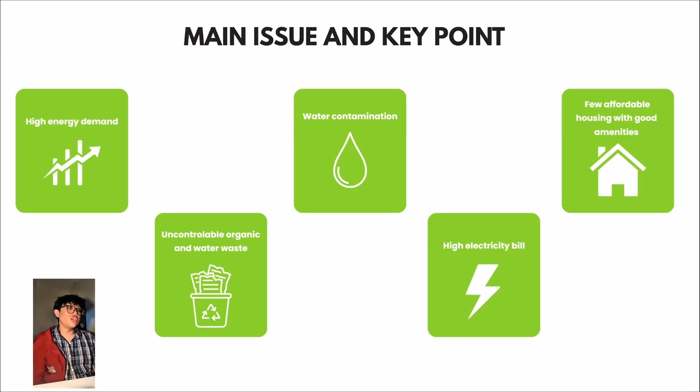Next, I will explain the main issues and key points. First, high energy demand. Second, uncontrolled organic waste and wastewater. Third, water contamination. Fourth, high electricity bills. And fifth, a lack of affordable housing with good amenities.

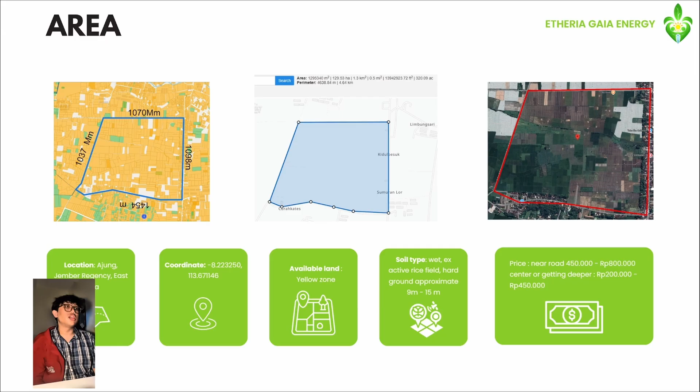And the next one is area. The location in Ajung, Jember Regency, East Java, and as we can see in the image on the left, the yellow zone indicates available land, and the soil type is wet, ex active rice field, with hard ground approximately 9 to 15 meters.

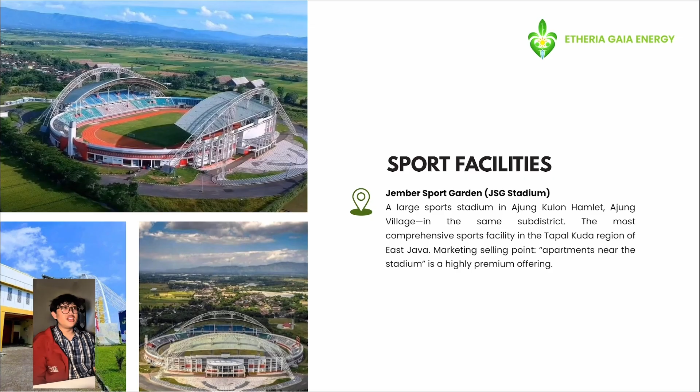The nearest healthcare facilities are first, Dr. Soebandi Hospital in Jember, second, Siloam Hospital in Jember, and third, Ajung Clinic.

The nearest educational institutions include Jember University as well as elementary, middle, and high schools and vocational high schools within the sub-district, the top schools in the city of Jember.

For daily necessities and the nearest food market, there's the Lippo Plaza Jember, Transmart, and the mall. Then there's Tanjung Market, Ajung Mini Market, and the local stores, as well as the Tanjung Manufacturing Industrial Park.

Next is grid and internet, electricity and fiber internet. Next, at the police station, we have the police station, the military sub-district command, and the sub-district office. The next fire station is the Ambipuji Fire and Rescue Station.

And so, these are the locations of the facilities closest to our community. Here is a layout of the community we designed.

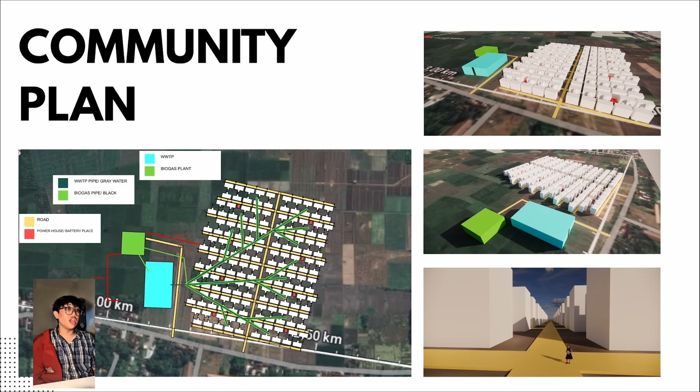Next, the problem in the current surrounding area. Bedadung River water quality. Based on available water quality data from the Bedadung River, there is evidence of serious pollution. The BOD level was recorded at 5.95 mg per liter, exceeding the class 2 threshold of 3 mg per liter, and high TSS and COD levels indicate physical and chemical pollution.

Additionally, harmful bacteria such as E. coli 98%, Aeromonas 96%, and Salmonella were detected, indicating a very high risk to public health. This pollution stems from activities in the surrounding area and is of critical concern because this river serves as the raw water source for the municipal water utility. Consequently, this situation not only impacts the environment but also has the potential to compromise the quality of the clean water used by the community.

Next, regarding organic waste management, approximately 58% of household waste in Ajung is organic waste. However, waste treatment facilities such as TPS3R are not yet available. As a result, much of this organic waste is disposed of directly into rivers, leading to increased BOD levels, decreased dissolved oxygen, and even fish mortality.

On the other hand, approximately 19% of plastic waste in the form of microplastics also contaminates the food chain in water bodies and has long-term impact on the ecosystem. In fact, this organic waste has great potential to be utilized as biogas, which not only serves as a waste management solution but also as a source of renewable energy.

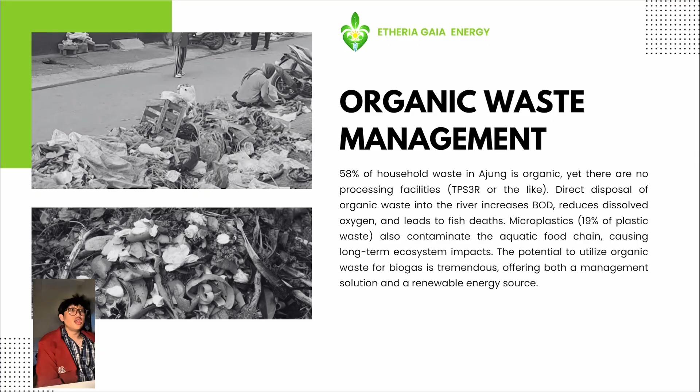Next, potential for organic waste management for biogas. Converting organic waste into biogas is highly feasible. A single residential area with 100 to 200 households can generate approximately 1,700 to 3,400 kilograms of organic waste per month. When collected from multiple areas, this volume becomes a significant source of raw material. With a centralized management system utilizing it for electricity generation, this solution can provide sustainable benefits for the community.

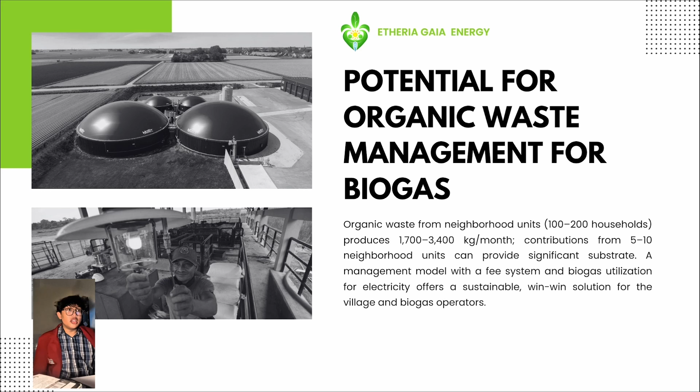The Bedadung watershed is also at high risk of seasonal flooding. In December 2025, flooding occurred at more than 20 locations due to land use change, sedimentation, and suboptimal drainage system. A lack of coordination in management from upstream to downstream further exacerbated this situation, particularly in Ajung Subdistrict. As the central area of the watershed, the risk of flooding is even higher because it lacks a well-planned drainage system and adequate infiltration wells.

In addition, the lack of communal wastewater treatment facility is also a significant problem, as the industrial and agricultural areas in Ajung expand. Domestic and industrial wastewater continues to increase without adequate treatment. Waste such as pesticides and latex enters irrigation channels and flows into rivers, further degrading water quality. Consequently, without centralized treatment, all waste flows directly into the Bedadung River, exacerbating pollution levels.

From a health and sanitation perspective, using contaminated river water for daily activities such as washing and irrigation can increase the risk of infectious disease.

Average energy usage: the electricity requirement per person is 1,300 kilowatt-hours per year, meaning each person consumes 3.5 kilowatt-hours per day. Using the benchmark from Kompas.id, the electricity usage for a household of 4 people is about 10 to 15 kilowatt-hours per day.

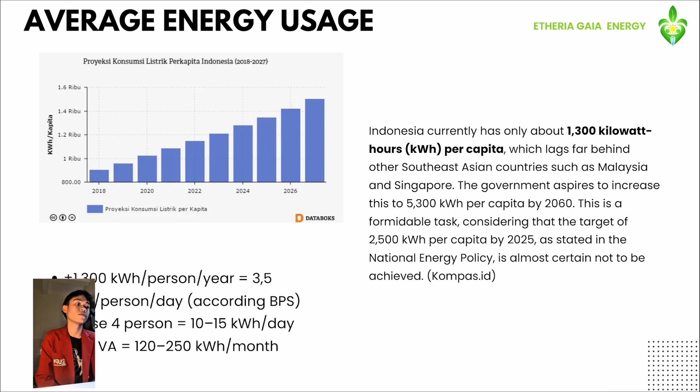For blackwater, we will use a biogas plant, using blackwater from 8,000 people, which can produce 400 cubic meters of waste per day, and collect all the organic waste from residents, estimated at 3 to 5 tons per day. Additionally, we will work with the government to help collect animal waste from nearby farms, waste from the surrounding community, and from traditional markets. We will also collect harvest waste from rice fields, which occurs about 2 to 3 times per year. This can resolve problems such as water sanitation, soil contamination from animal manure, high electricity costs, and high waste volume.

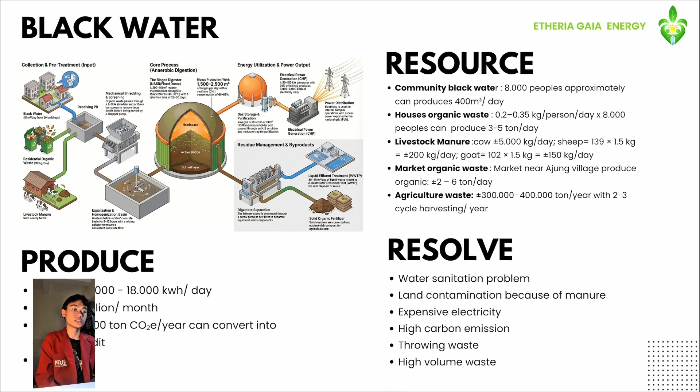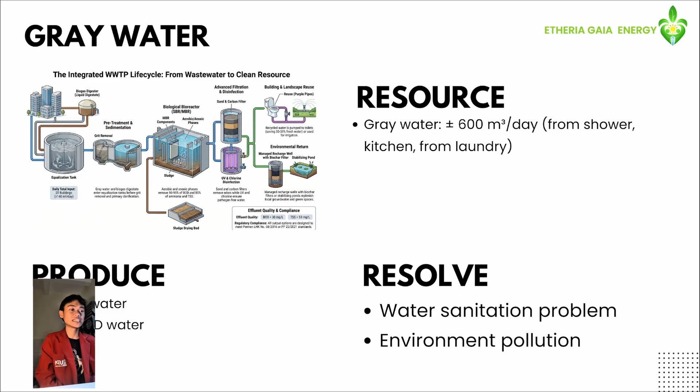For greywater, we will use a wastewater treatment plant using greywater from 8,000 people, estimated at 600 cubic meters per day, capable of producing clean water with low biochemical oxygen demand after filtration. This can resolve issues of water sanitation and environmental pollution.

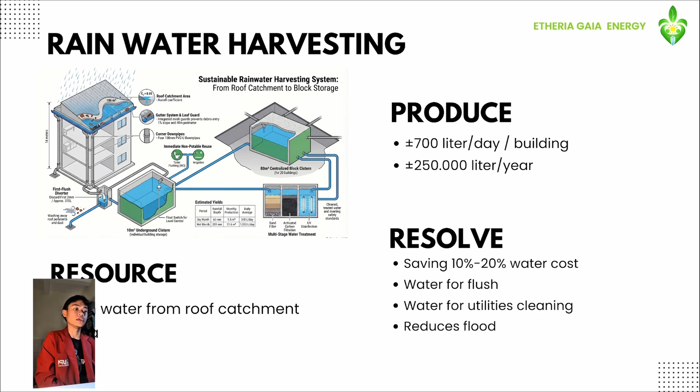Rainwater harvesting: we don't want to waste rainwater that falls from the roof, so we want to utilize rainwater harvesting, which can produce 700 liters per day per building during rainfall, and can cut costs by 10 to 20% and reduce flooding.

Solar panels are the most suitable alternative energy in this tropical country, capable of generating 400 kilowatt-hours and 20 kilowatt-hours per building, with total annual production reaching around 148,000 kilowatt-hours per year. We use monocrystalline panels of 5 kilowatt peak per building and install a battery pack for every 20 houses with a capacity of 100 kilowatt peak.

Solar panels can resolve the following issues: higher electricity costs, reducing emissions, and mitigating outages.

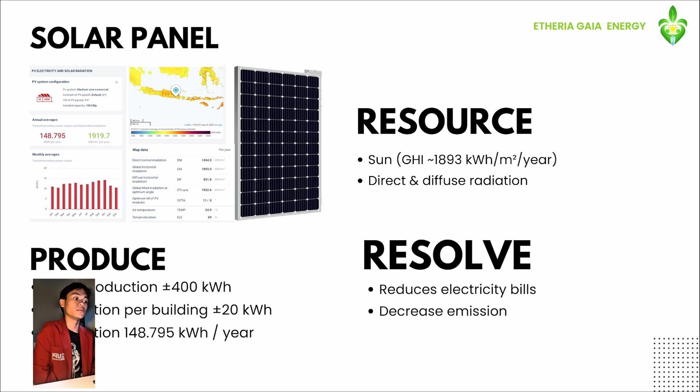Smart grid: since we are using alternative energy sources whose output may not always be consistent, we anticipate energy waste by using a smart grid system. By monitoring electricity usage habits in each unit using meters installed in every building, data will be sent to the powerhouse to distribute power according to each load requirement.

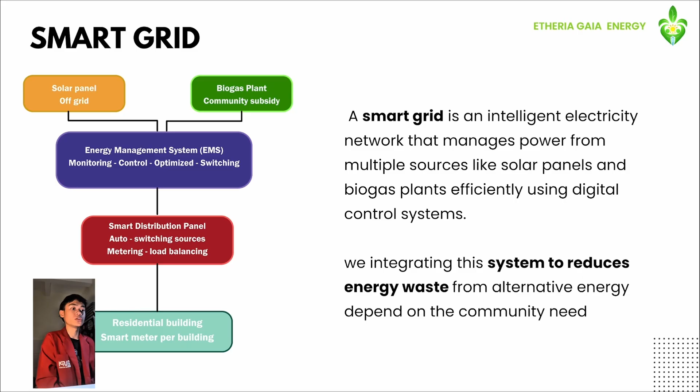Electricity flow: we set up the flow as efficiently as possible to produce electricity that is affordable, reliable, and usable. For the amenities, we have concrete road lighting, biogas, electricity cable, drainage, and wastewater treatment plant.

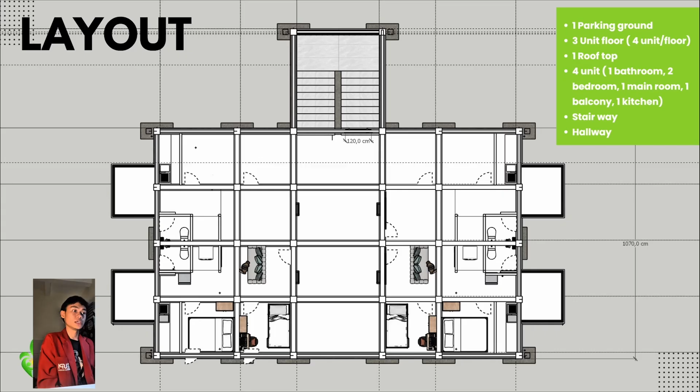This is our building layout, and for the buildings themselves, we have one parking ground, 3 unit floors, and 4 units per floor, one rooftop, and one unit containing 1 bathroom, 2 bedrooms, 1 main room, 1 balcony, and 1 kitchen, with a stairway and hallway.

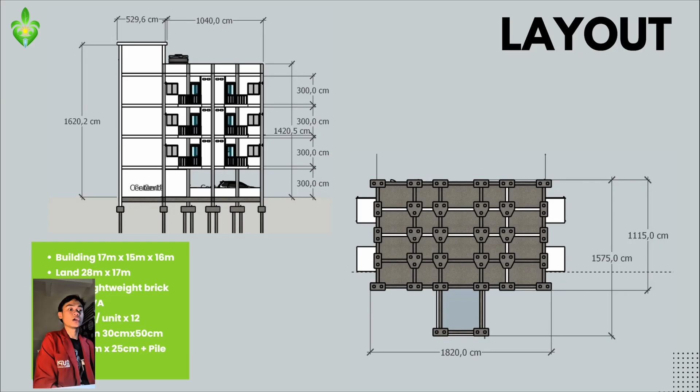For the material, we have AAC brick or lightweight brick, and we have 20,000 volt-ampere, with each unit at 1,300 volt-ampere times 12 units. We have a base, a tie beam using size 30 centimeters by 50 centimeters, and for the pile, we have 25 centimeters by 25 centimeters using a pile cap.

For the design, the main building measures around 11 meters by 17 meters without stairs, with a unit size of 30 meters squared, and per unit size is 5 meters by 6 meters net, approximately 32.3 meters squared gross.

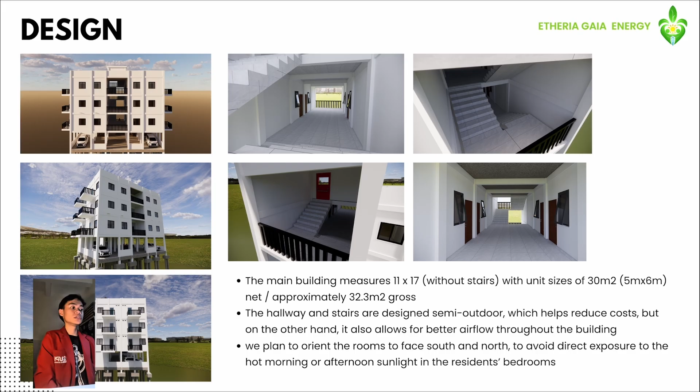The hallway and stairs are designed semi-outdoor, which helps reduce costs but also allows for better airflow throughout the building. We plan to orient the rooms to face south and north to avoid direct exposure to hot morning or afternoon sunlight in the resident's bedroom.

We designed the airflow within the units using cross ventilation to avoid air getting trapped inside. We use 15 cm by 30 cm vents above every door, install windows in every room, and benefit from a balcony door that can be opened for better air circulation.

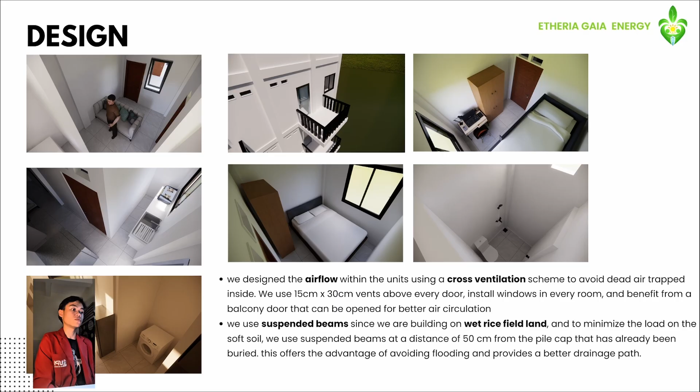We use suspended beams since we are building on wet rice field land, and to minimize the load on the soft soil, we use suspended beams at a distance of 50 cm to 100 cm from the pile cap that has already been buried. This offers the advantage of avoiding flooding and provides a better drainage path.

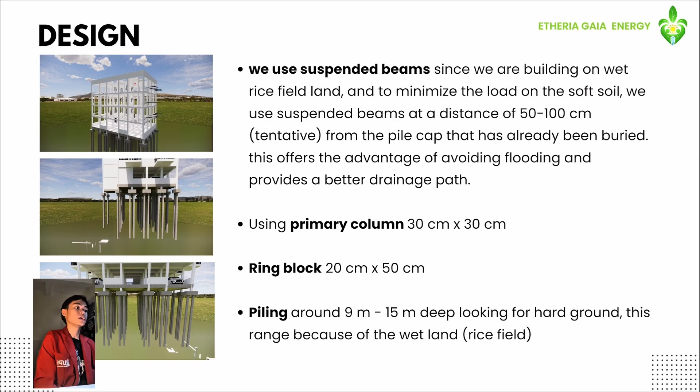As mentioned before, we use suspended beams 50 to 100 centimeters tentative from the ground and from the buried pile cap. We use primary columns 30 by 30 centimeters, ring block 20 by 50 centimeters, and piling around 9 to 15 meters deep to reach hard ground. This range is due to the wetland or rice field conditions.

Let's look at our KPR system. In our community, we use a mortgage system with a flat interest rate. A flat rate mortgage means the interest on the home loan is calculated based on the initial principal amount, resulting in equal and fixed principal and interest payments every month until the end of the loan term.

Regarding the subsidy system, we apply subsidies to home installment payments in accordance with our country's regulations, with a maximum installment period of 20 years. The original price of 250 million becomes approximately 390 million.

We are also collaborating with the government to support our community, with the government providing subsidies for home purchases through mortgages as a form of assistance for low-income people, enabling them to own homes with more affordable installments. For the term, it ranges from 15 to 20 years.

In our region, East Java, the maximum selling price per unit is 284 million. We set the selling price per unit at 280 million with a flat interest rate of 5% per year. For the term, we offer options of 15 to 20 years.

The total cost for 15 years is 490 million rupiah, and for 20 years it is 560 million rupiah, with monthly installments of around 2,700,000 rupiah and about 2,300,000 rupiah respectively.

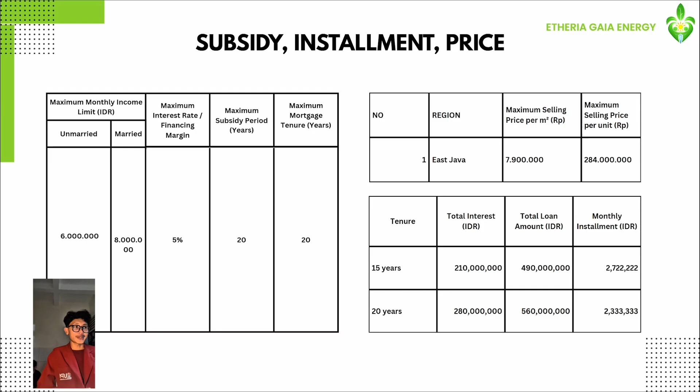Financial model for the biogas plant and wastewater treatment plant construction: first, partnership with CSR; second, partnership with government; third, investor; and then self-funded from selling. Next, for residential construction: first, investor; second, self-funded.

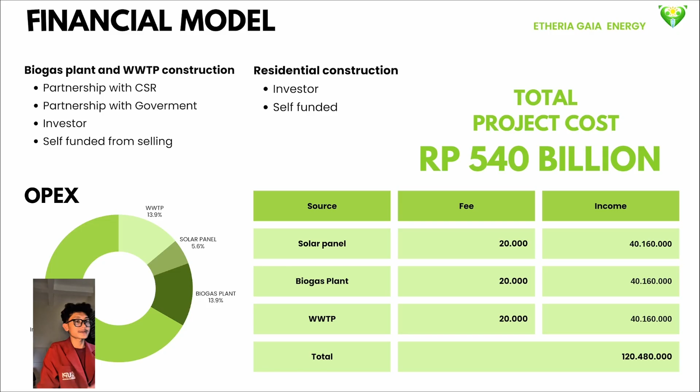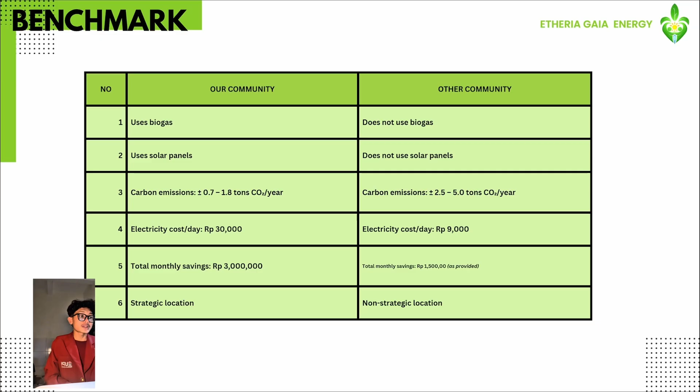Regarding benchmarking, the advantage of our community compared to other communities in the Jember area is that our community uses solar panels in daily life. We also use biogas energy to process waste, which is very beneficial for the environment around our community. This aligns with our vision to protect and improve the environment through innovation in transforming waste into renewable energy. As a result, members of our community can access all of this at an affordable price.

For the timeline: first year, carry out construction planning and handle permits as well as land surveys, and build the fundamental infrastructure such as roads, pipes, drainage, and waste pipeline. Second year, build the wastewater treatment plant and biogas plant.

Third year, build 30 to 50% of the residences and a powerhouse for every 20 houses, including solar panels on every completed building, and connect the basic structure for the biogas and wastewater treatment plant. Fourth year, continue with the remaining houses with the same specifications as those in the third year, and start promoting and selling the buildings that have been constructed.

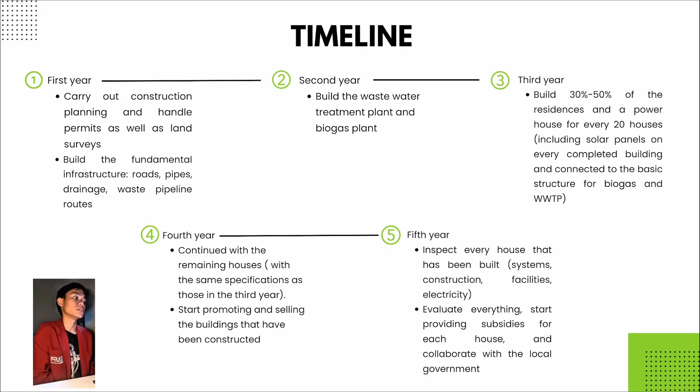Fifth year, inspect every house that has been built, including system, construction, facilities, and electricity. Evaluate everything, start providing subsidies for each house, and collaborate with the local government.